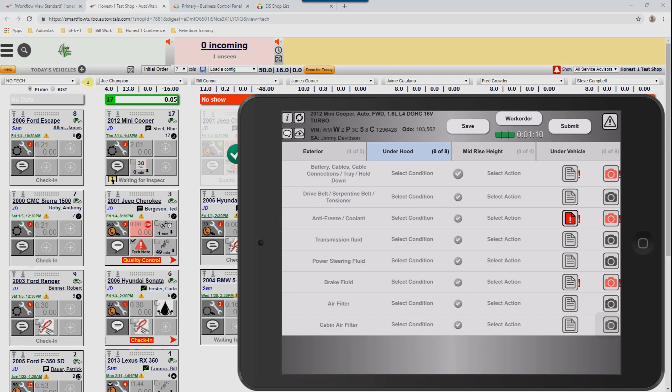In this case, I'm going to go ahead on the serpentine belt and tap on it that it's got a problem. I'll tap where it says select condition instead, and say the serpentine belt is fraying. Then I'll tap off to the side, and you'll see it's automatically marked as a fail.

Now I'm going to tap where it says select action, and say what I want to do about it. In this case, I want to replace the serpentine belt. Then I'll tap off the side.

Anything that requires any type of repair, in any way, shape, or form, we want to document it with a picture or video. So I'm going to come in here and snap a picture — taking a picture of something I've got in my office here.

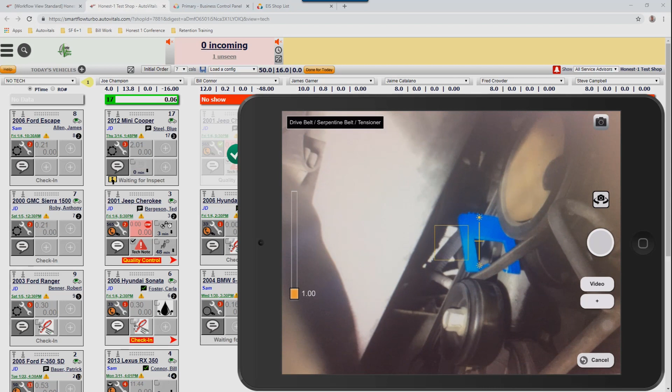I'm going to grab that, take a picture, and start using some of the tools a technician has at their disposal, the same way they'd educate a customer in the shop. So I'm going to tap on this red arrow and turn it on.

On that red arrow, you'll see it has some tools we can use. First I'll touch one end and drag it exactly where I want to point, then touch the other end to adjust the orientation.

This red arrow is the same as if a technician used their finger, a pencil, or a laser pointer at the side of the car to show the customer exactly what they're trying to draw attention to. Next, I'll tap on this little notepad at the bottom and describe what I'm trying to show — same as the technician would do in the bay if a customer was there.

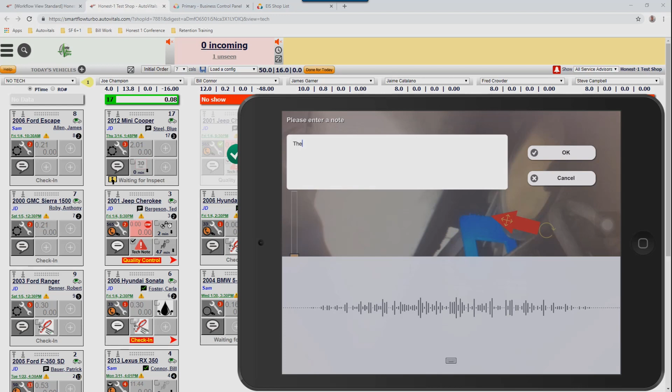I'm also going to start using the power of the tool with voice to text. I'll tap on the microphone and talk: 'The red arrow is pointing directly to the surface of the belt, where you can see the edge is frayed.' Then I'll press upload.

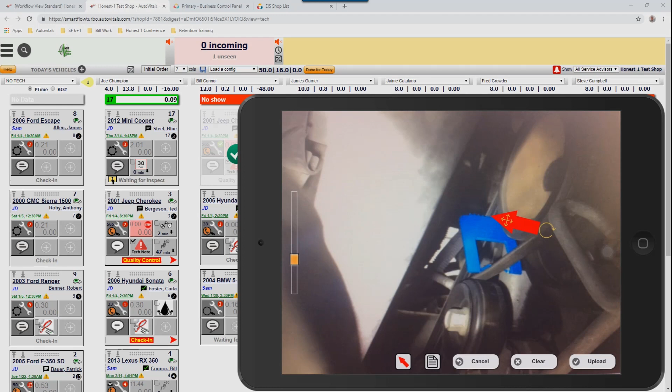So these are tools that we have to work with on the tablet. Again, what we want is the service writer and technician working together as a team, using these tools to educate the customer.

The next thing I want to do is point to this note field here and tap on it. When I tap on it, you'll see a couple things going on — there's a little camera icon with a number count. I'll press that, and it will open up and show me the pictures I've taken.

And the good thing is I can also see the topic that I've taken the picture at and the notes right there on the top of the picture. So a great way to think about this is if you've taken some freeze frame data, screenshots, LabScope waveforms, pre-alignment specs, and so on.

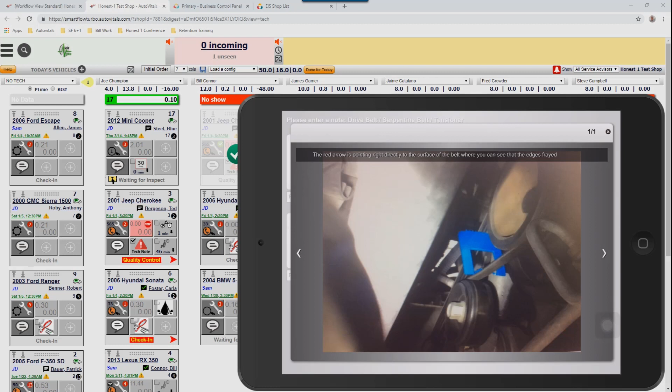This is a great place where the technician can go back and find that information. In the note area here, you can see that it's broken down into internal and external notes. So an internal note, what we want to do is supply the service writer with what they need to do their job.

So I'm going to tap in that area, and tap on the microphone again. This vehicle needs to have the serpentine belt replaced, period. It's frayed on the edges. New paragraph. Serpentine belt has a 130 amp alternator. New paragraph. Estimated labor time, 1.2 hours.

So that's really all the service writer needs to do their job, and it's all protected from the customer, and it says for shop eyes only. What the customer needs to know is, and again I'm going to tap the microphone, this belt is fraying, needs to be replaced. It will derail soon and cause you to be stranded. And I'm going to press OK.

So again, what we want to do is while we're creating our test topic here, mark some topics good, no issues, and make sure you've got pictures on a minimum of 2 topics.

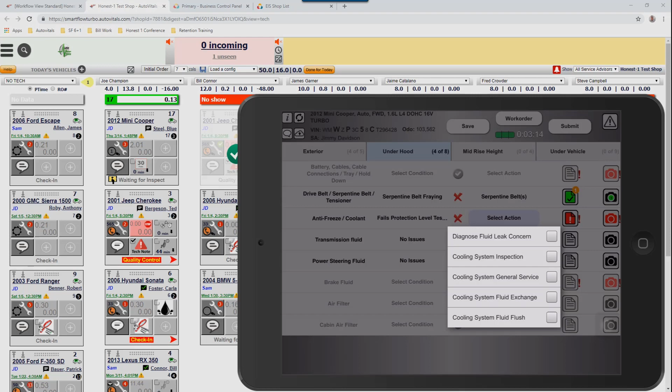So I'm going to go ahead and grab one other topic here. I'm going to say protection level fails. I'm going to tap my action, what I want to do about it. Cooling system fluid exchange. I'm going to see if I can find a picture that I can take. Maybe I've got one here. We'll just grab this one and pretend it's the cooling system.

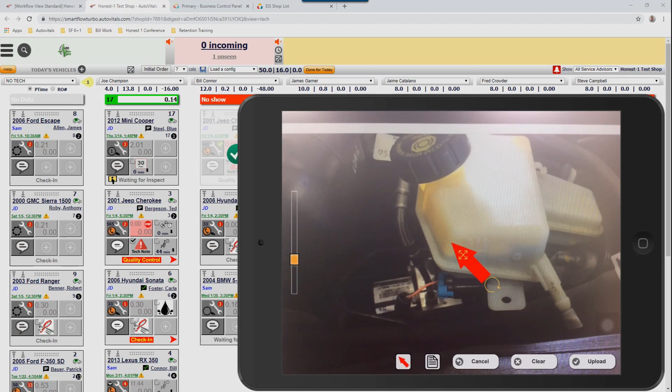Put a note here. Level is low and protection level is below the recommended freeze point. And upload. So if you would, I'm going to give you approximately 4 minutes to create an inspection topic or your mock inspection sheet, and then we'll move on.

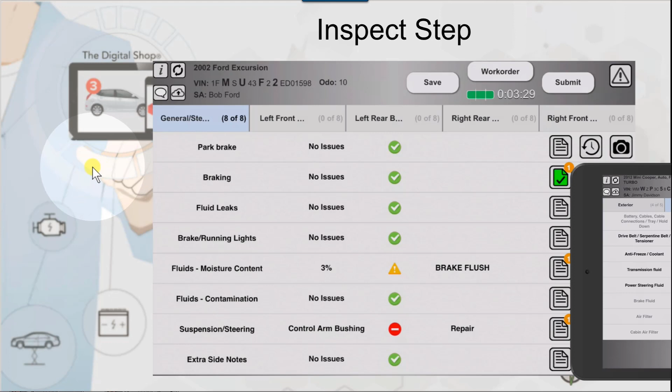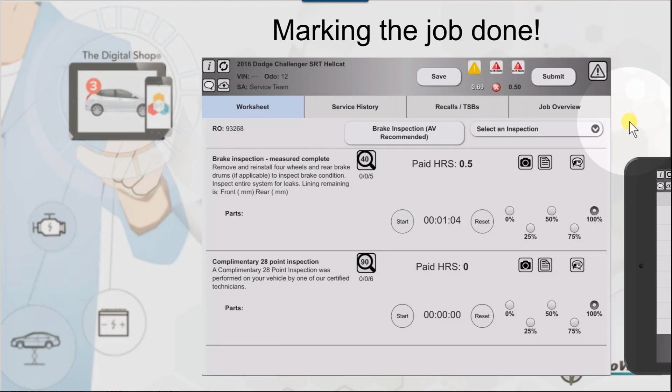What we want to do next is be able to submit the inspection results to the service advisor and let the technician continue working on the vehicle. And to do that, what we're going to do is mark the job complete, and then we're going to use the Smart Chat bubble to submit it to the service advisor. So let's switch back over to Live Shop and see how this works. And bring my tablet back up.

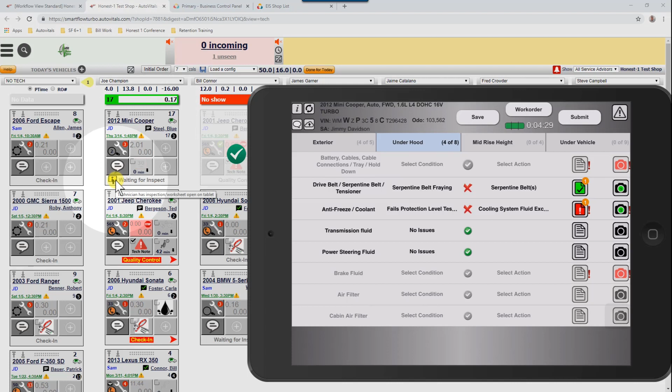And again, while the technician has been working along, you can see this timer's been incrementing, and you can see this bar coming across, and you can see the technician still working away. So we want to submit this to the service advisor. So what we want to do is tap where it says work order and change back to the worksheet.

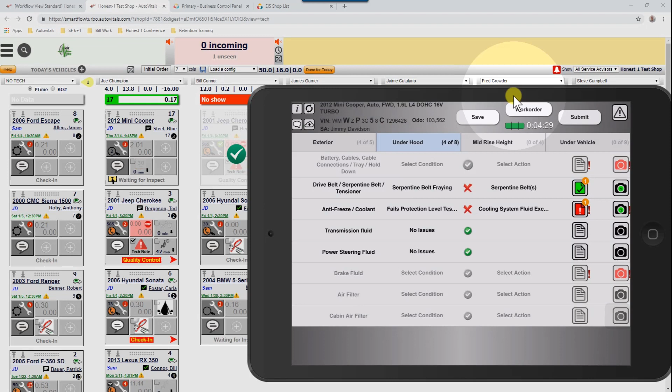We're going to pretend the inspection is completely done. So what I'm going to do is tap and mark the inspection sheet 100% complete. And then I'm going to tap the Smart Chat bubble that's right over the top of it. And before I do, I want to make sure you draw your eyes' attention to this area up on the top. And so now the technician can still go about his job working on his vehicle. He submitted this to the service advisors so they can go about and do their job.

So as soon as the technician submitted the inspection results using the Smart Chat, what's happened is the service writer gets a message at the top of today's vehicle page, and that message has a nice link that they can click on and open the repair order. So in this case, you can see that the Smart Chat bubble was used to submit from the labor line for the inspection topic.

When an inspection comes in from the technician, the first thing a service writer should do is go ahead and click on the inspection results and look it over and make sure that everything complies with the shop policy for doing inspections. So in this case, we're going to pretend that it doesn't comply, and what we're going to do is send it back to the technician. To do that, you're going to click Reassign Inspection, and you're going to click OK and put it right back on their tablet.

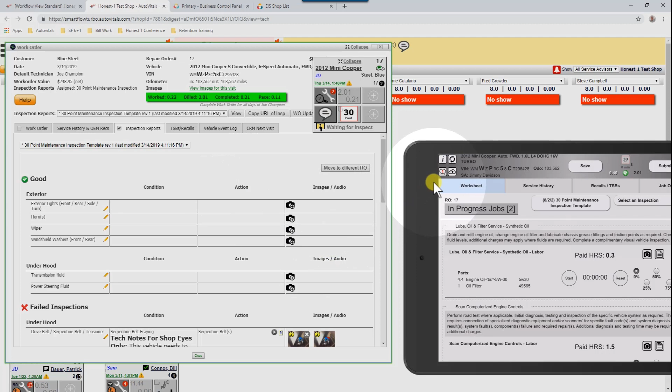I also want to highly encourage you that if you send it back to the technician, don't ever send it back without letting him know what needs to be done. To do that, click on this bar, click on the chat bubble, and send them a message letting them know what needs to be done. In this case, we'll say it needs tread images, the technician forgot, then press send. Don't send it back without giving some expectation of what needs to be done. On the technician's tablet, if they have it open, they'll see it flashing, and if they're not paying attention, they'll soon hear an audible alert. I'm just going to dismiss that audible alert.

Now we're going to look over the inspection results that were sent. In this case, everything's in good shape. What we want to do is move the repair order to the lock step, where it's creating estimates so nothing goes to the technician as it gets added to the management system. So in this case, I've locked this so nothing goes to the technician. I'd like you to respond to the poll and let me know you've locked yours also.

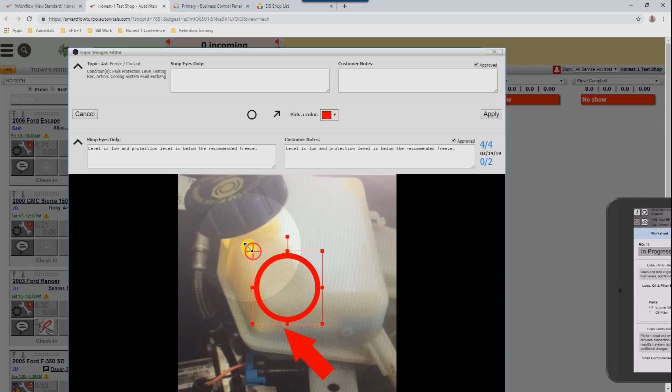I might put a little more reinforcement here. I might come in and use one of the tools, like maybe a crop, to get it dialed in a lot closer for them to work on. I might add another circle around the area to draw a bit more emphasis on it. When you're going through doing your mock inspection, come in here and just grab some of the tools and use them to see how they work.

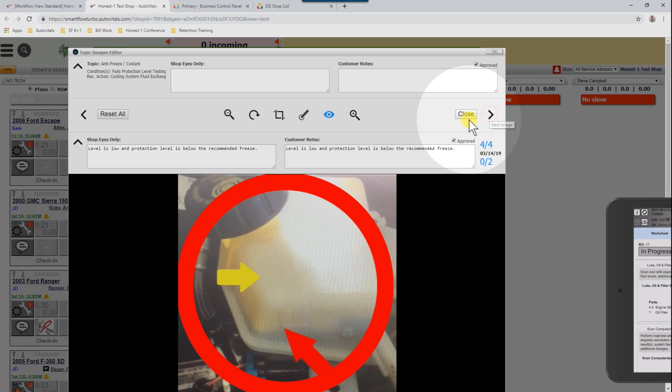I might also want to experiment with changing the colors on them and so on. In this case, I'm going to leave that red, but I'll add another arrow to it and make it a different color just because I can. Again, experiment a little as you go on. You'll see these number counts change as you go through here. I'm going to click apply, and if there's nothing else I need to do, I'll press close, and I've got all my editing done at this time.

The next thing I'm going to do, depending on what management system is on it, I might go ahead and press the work order update button and send the information, the service packages or labor codes that have been in here, the canned jobs, send it over to the management system so I can actually estimate.

So after we've done all our editing and moved it over and built a good estimate, anything that the technician recommends on the inspection should be estimated by the service writer and be ready to present to the customer. And when I say anything the technician recommends, I mean recommended and supported by proper documentation. So if that proper documentation is some text, a picture, circle, arrow, or whatever, if it's supported by proper documentation, it needs to be estimated by the service advisor.

After they estimate it, they're going to move it over to a workflow step that's waiting for approval. What's going to happen is they'll have this little icon pop up with a clock in it. And when 20 minutes goes by, they're going to see a little phone pop up on the screen. So what we're going to do next is move back over to Live Shop, and we're going to send it to the customer.

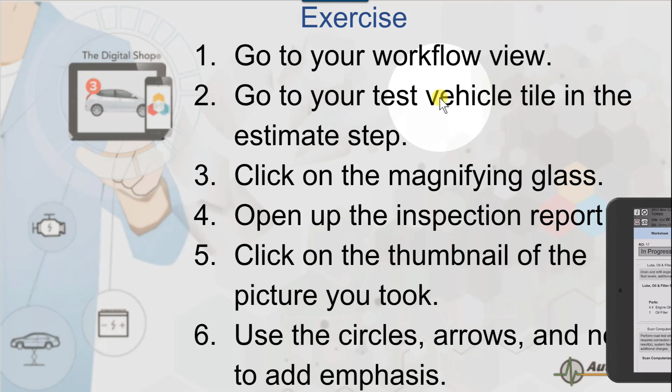Before we go that far, spend just a few minutes and edit some pictures on your own. Use some circles and arrows, get them on the screen, and let's make the inspection results impactful enough to the customer that they're ready to start talking about options and pricing. Authorization through education is the tool we want to use, and we want to put that customer in a position to buy rather than feeling like they have to defend themselves from being sold to.

The next thing we want to do is move over to Live Shop and actually send the results to the customer simply by moving it over to the approval step, and that's what we're going to do next. So let's move back to Live Shop.

Now what I'm going to do, because the estimate's already completely done, is move it over to waiting for approval. When we click OK, it's going to let us look over the inspection results and make sure they're in great shape before the customer actually sees them. Then the only thing we have to do to send it to the customer is just press OK.

So what I'd like you to do is move it over to waiting for approval and send the results to yourself. I want you to see the link here where the customer can go ahead and adjust their communication settings. They can move these sliders on and off and press submit to configure these exactly the way they want to.

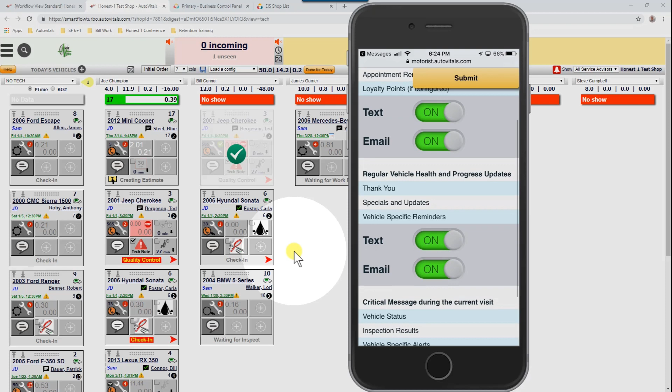The next thing I'm going to do is come down here and get the inspection results, and let's take a look and see how we did.

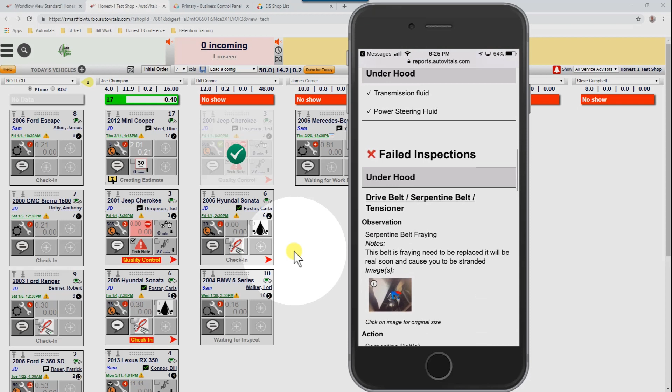In this case, we can see the inspection results, the service writer, technician, see all the things that are good. We can see things that have a picture on it. We can tap on that picture, make sure the customer understands that they can go ahead and click on it, and they'll be able to see exactly what that picture means to them along with the text and be able to zoom in on it. And if we've done our job, we'll also have some informational videos that show them exactly what's going on with their vehicle.

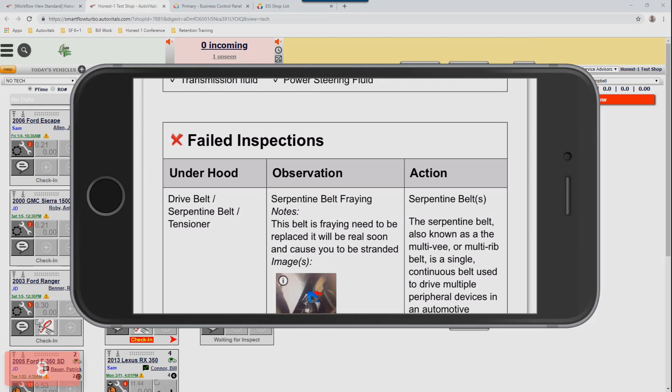So again, let me know with the poll that the inspection results came to you on your device. You can see this number right above here that's been incrementing as I've been looking over the inspection results. You can see this number counting up. We want to get to a position where the service writer lets this number count up until it doesn't count up any higher. And if 20 minutes elapses from the time you sent the results to him, that's when you'll get this nice little phone pop up.

The way I like to use this phone is if you click on it, it's going to pop up and show you the customer's number. If you call and you don't get a live human, press cancel and just leave the phone on it. If you call and you get a live human, come over here and click OK, and you'll see a nice check mark, and it's going to move back over here the way you'd expect. At this point, we should see waiting for approval.

The next thing we want to do is after work has been approved, come down here and mark it waiting for work finished. Click OK.

It's again going to verify that all these jobs added on here are what we want the technician to actually do. We're going to watch the technician mark the jobs done on his tablet. So I'm going to grab my tablet and mark a few jobs done. Let me stretch this out a little bit bigger so you can see. As I'm marking jobs done, I'd like you to watch these numbers here change.

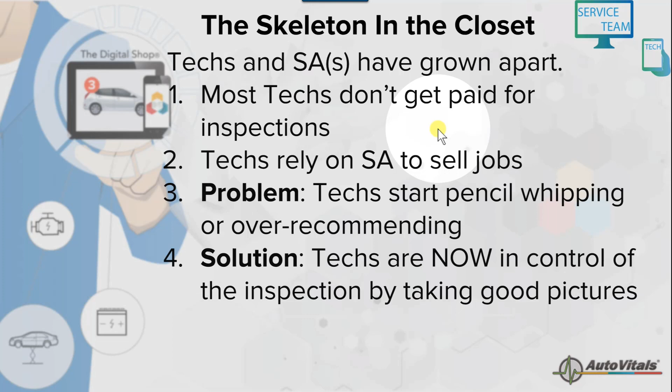If it doesn't get approved today, it's no big deal, because we're going to repurpose the inspection content on the next reminder sent to the customer. Technicians are now in control of their own destiny by working with the service advisor to put the customer in a position of authorization through education, moving them into a mood to buy rather than feeling like they have to defend themselves from high pressure sales. Anytime we can give the customer the ability to make educated buying decisions based on the content we send them, that's a great place to be.

Let the technicians witness the way you're doing this at the counter with a customer if you can. If not, maybe send these inspection results to their own device and let them take a look. Or in a shop meeting, open up some inspection results and let your team critique each other's work in a positive manner—what can we do better with these pictures, circles, and arrows to make this more educational to the customer, in terms they could understand, not technician lingo.

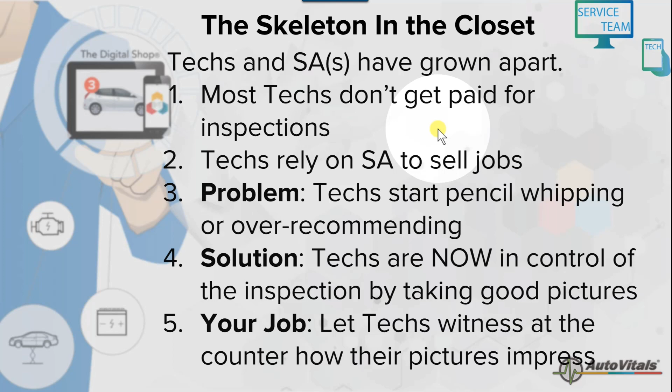So these are some exercises for you to do when you go back to your shop and start working with your staff. As the implementer, your job is to learn today and then immediately start training your staff, which will be great reinforcement for you.

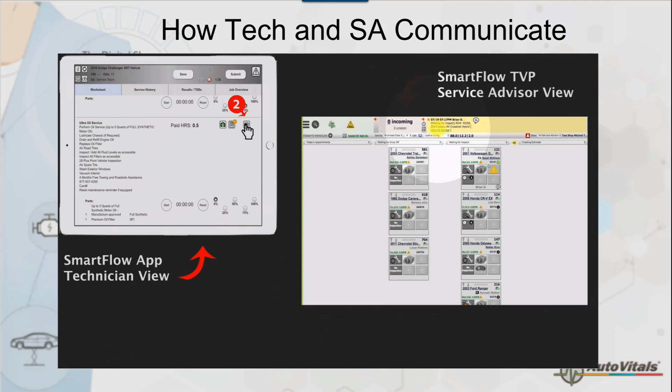We want everybody to know that using the internal chat communication is the number one way to save time, so there's no wasted time and there's great documentation. You can see that yellow arrow, or highlighted yellow area, telling the service writer exactly where the part needs to be added or the adjustment needs to be made, so they don't have to read the entire repair order. Just tapping on the smart chat icon right on the labor line where the change needs to be made highlights it in bright yellow for the service advisor.

We also want to make sure you feel empowered to go ahead and train your staff, and that you know there's a tool out there called the Business Control Panel. I'm going to give you a brief overview of it—I just want you to understand where it is and how to find it, so you can get with your product advisor and start using it.

To find it, go over to the hamburger menu and left click on it. Go down to where it says BCP, Shop Meeting, and click on it. That will open up the Business Control Panel.

The Business Control Panel is a great tool because unlike traditional dashboards where you had to first look and then do detective work to figure out what's going on, we put behaviors in a graphical format so you can understand everything that's happening. When you first start with your product advisor or digital coach, they'll help you set some thresholds you can design for your shop to make sure everybody's trending in the right direction.

Then they'll go into an area we call primary, where we know every shop has to have a decent average repair order dollar amount, new customers, retention rate, and so on. Let's go over to a live shop so we can look at how this works. Here I'm going to click on ARO, and I'll show you a graph of how it's set up.

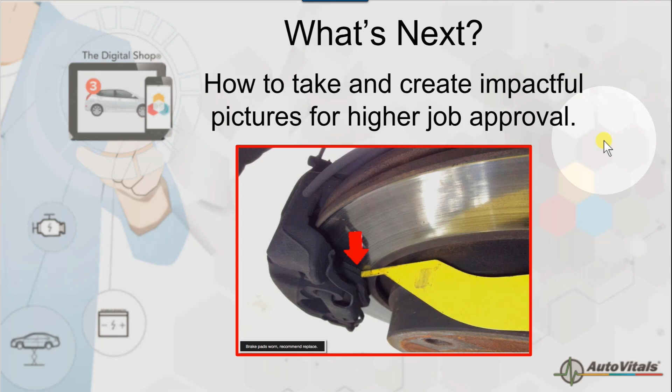I'd like to encourage you, if you don't already belong, to sign up and join the Digital Shop Talk Forum. This is a place with over 3,200 people just like you, there to help each other out, asking and answering questions.

I'd encourage you first to search. If the topic of how to do this or that isn't in there, ask the question. We don't allow topics that are perceived problems with either today's vehicle page or the tablet - for that, use the help button. There's a yellowish orange help button on today's vehicle page on a work order pop-up, a little triangle on the technician's tablet to submit a help ticket, and on the business control panel there's a blue question mark. These are all areas where you can submit questions or help requests.

The reason we don't put these type of questions on the Facebook forum is that we capture a lot of information, just like if a check engine light comes on a car - there's freeze frame data. We capture the same kind of information from today's vehicle page or the tablet, so we can get to the root cause of the problem quickly and efficiently without a lot of back and forth with the shop.

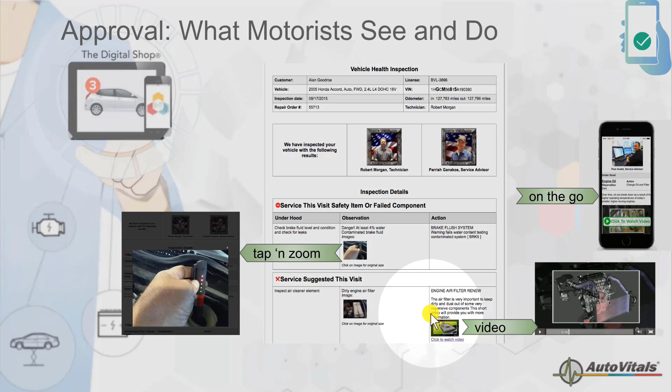We also talked about taking some pictures of things that are good. Our drop-off conversation with the customer goes along the lines of, "Ma'am, sir, this is what an inspection result looks like. You're going to see some pictures here. These are pictures of things that are good. You're going to see some pictures of things that are wearing, and some things that, in some cases, actually need some attention."

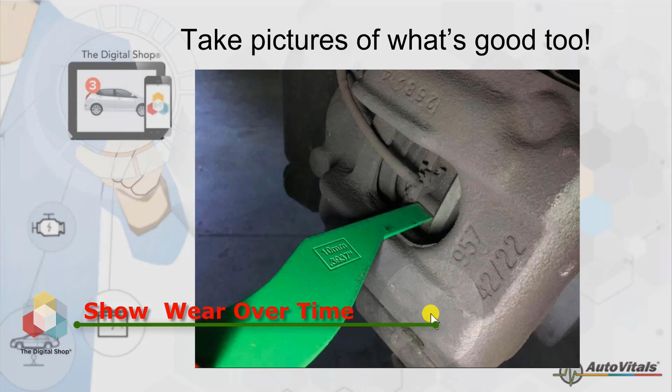The reason we take pictures of good items for future visits is because we can use that to help predict over your service visits with us the rate things are wearing at, in case you need to budget for future repairs. So that's a great thing to do.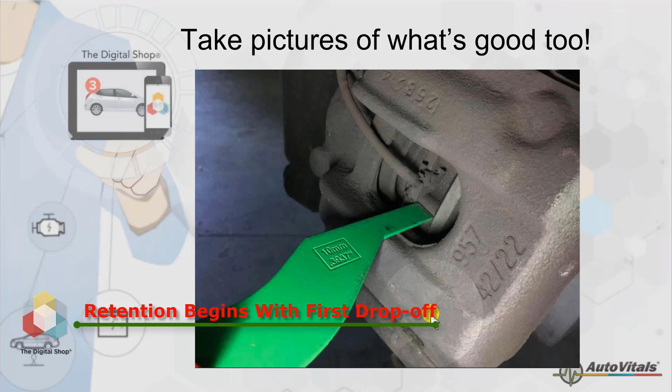What I'm going to do here in just a minute is actually start through the picture taking process and show you how to use some of the tools on your tablet.

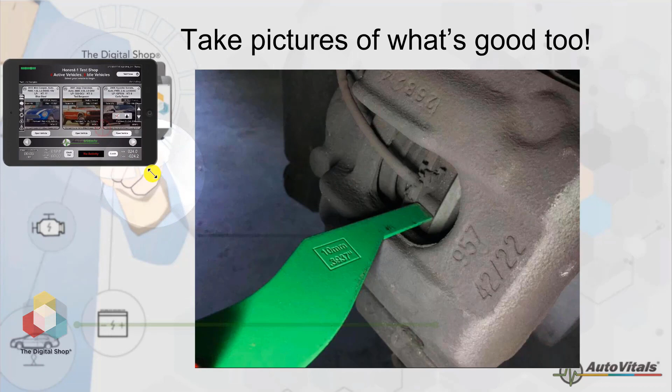So what I'd like you to do is get your tablet out and follow along with me. I'm going to put my little mini over here on the side so that you can follow along with me and still be able to take a picture of what's in the center of the screen here.

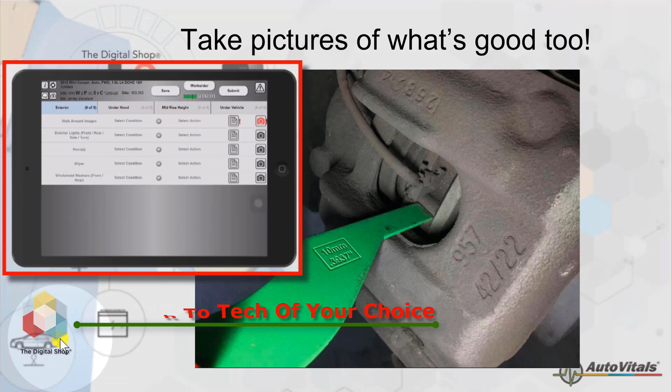So if you would, dispatch your little Mini Cooper to a technician of your choice. Press the open button. Open an inspection sheet of your choice. And what we want to do first of all is find a brake topic.

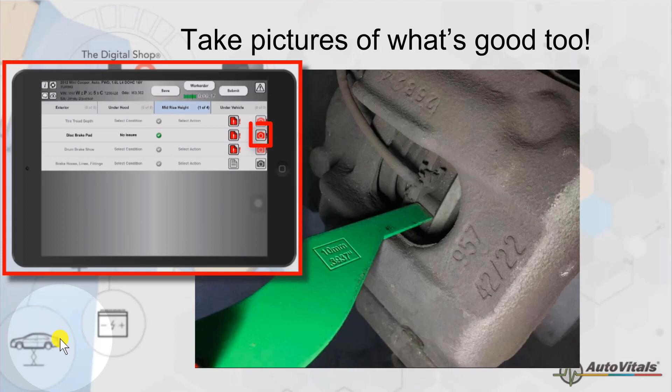In this particular instance, I'm going to tap on my brake pad as far as it having no issues. I'm going to tap on the camera icon, and I'm going to snap a picture of this. And if you would, follow along.

I wanted to add a red arrow. I want to take the red arrow and touch on the point end of it and drag it over toward where the brake gauge meets the caliper or the brake lining, and rotate it around.

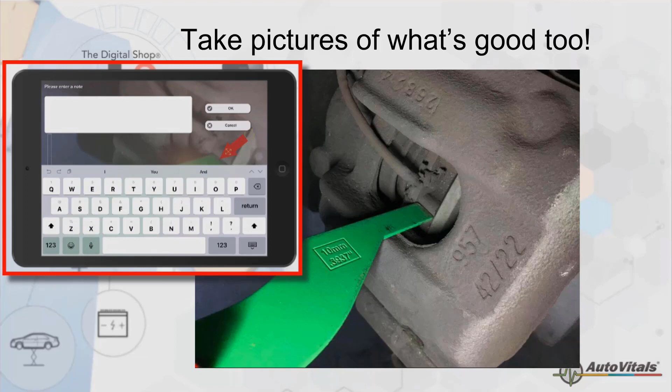I want you to tap the notepad on the bottom edge of your camera right here, and add a note. I'm going to tap on the microphone to add this note, and my note is going to say: the arrow is pointing right directly to the inner brake pad on your front caliper, and it is in great shape today.

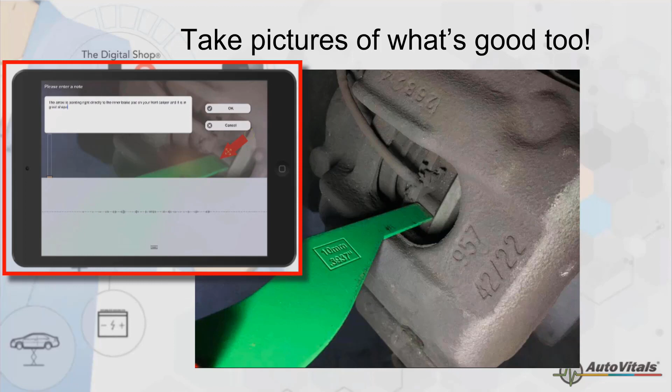10 millimeters is almost new. And then click upload, and you finish out your first picture.

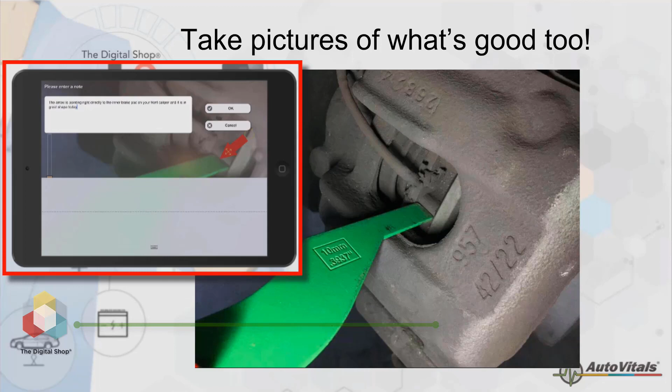The next thing I want to do is switch on to the next topic. I'm going to move over and get my other image up here. I want to add an arrow. Again, we're going to take and point it right directly to it.

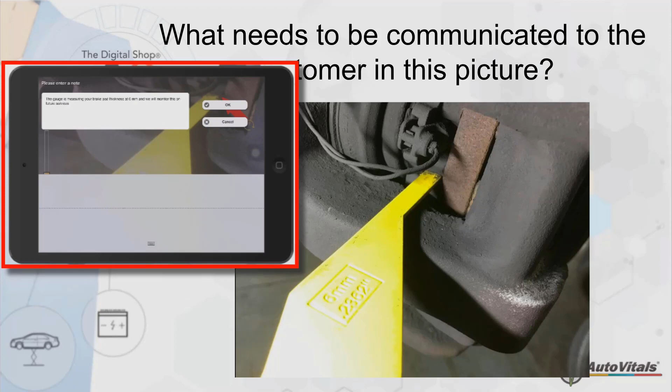The gauge is measuring your brake pad thickness at 6 millimeters, and we will monitor this on future services. And we're going to upload it also.

I just want to make sure we mark no topic on this one is needed. And on the second picture I took, I want to go ahead and make it say suggested for future service. You'll see why when we go do some editing. Again, it doesn't matter that we're putting these in the exact place they go, because we're talking today about editing pictures.

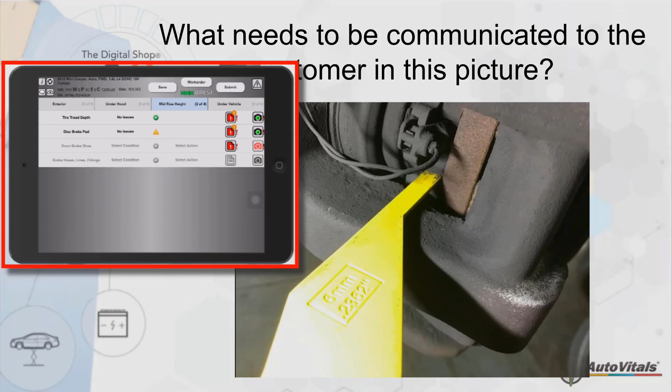So when you think about it, a battery status tester with the terminals, taking a picture of that can be a quick win. And if it's not, we're still showing the customer the condition of their battery changing over time as it comes in on subsequent visits.

Cracking belts is another one. Brake pad thickness, so we've already taken a few pictures. Fluid leaks and anything in the suspension that has any kind of movement, rattle, or noise. Even pulleys, grinding noises and things like that, because when we take video, the audio is still going to be captured with it. You can see here a couple instances where we've actually done a pretty good job of that. But we're going to move forward a little bit more.

I want to challenge you to understand that a picture alone does not get you a job authorization. When you look at this picture, whether you're a service advisor or technician, look at it through the eyes of the consumer. Does this picture really tell you anything? Would it stop your thumb on the phone, or could you even tell what's going on in the picture? A picture alone doesn't really do justice.

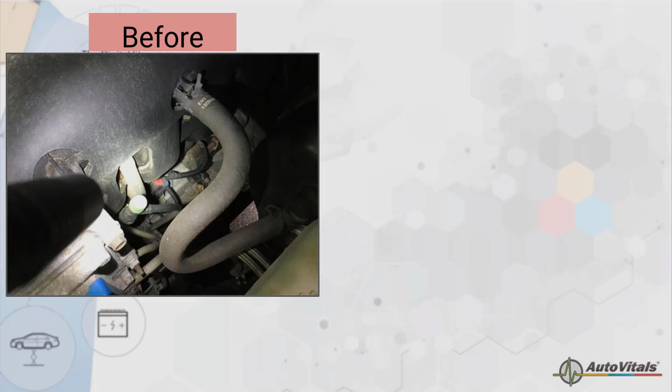But if we take it one step further and put some emphasis on the picture by pointing an arrow to it, drawing a circle around it, and adding some text, it makes it very apparent that the tab on the connector was damaged and the sensor was not plugged in all the way. Can you see the difference between an edited and a non-edited picture?

Think about the customer. Think about what they would see in the shop if a technician had the service writer walk the customer out to the vehicle and show them what's going on. I promise you the technician is going to take their finger, a laser pointer, or a long narrow screwdriver and point right to that connector, and say a few words to the customer: the tab is damaged, the sensor was not plugged in all the way, and this is what was causing your problem.

Again, we don't really want the customer hanging around the shop, but we still want to use the number one tool we've had for as long as I can remember, and that's show and tell at the side of the vehicle with the service advisor and the customer.

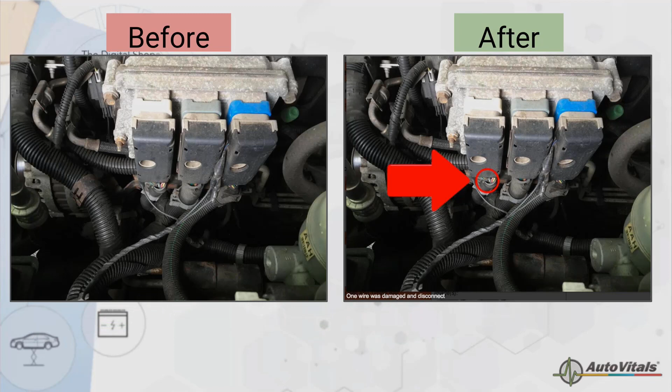Here's another before picture. I challenge you to find and tell me what was wrong with this, again looking at it through the eyes of the customer. Now we've got a service writer and a technician teamed up. The technician is taking his finger and drawing the red arrow, the service writer adds a circle right around it, and the technician supplied some text that the service writer enabled. So here it's very clear to the customer that the wire was damaged and it was disconnected.

Again, this is how we put the customer in the position of authorization through self-education, where they call the shop ready to talk about options and pricing.

We're going to take some more pictures here in just a minute, but before we do that, I want to open up a live shop and make sure your settings are configured properly for the default colors of the arrows for the service advisor.

To verify this, we're going to go to the top left where the three bars are, called the hamburger menu. Left click, and go down to where it says Inspections, then go to Inspection Sheets.

We want to make sure the color for each of these statuses actually draws the customer's attention to it. To change the color, click on the pencil, then use the color picker to choose the color of your choice. Good is normally green, future or suggested service would be yellow, and fail would be red, just like a traffic signal. But you could have more statuses enabled for your shop, and you'd want to choose the appropriate color, which becomes the default color for your circles and arrows.

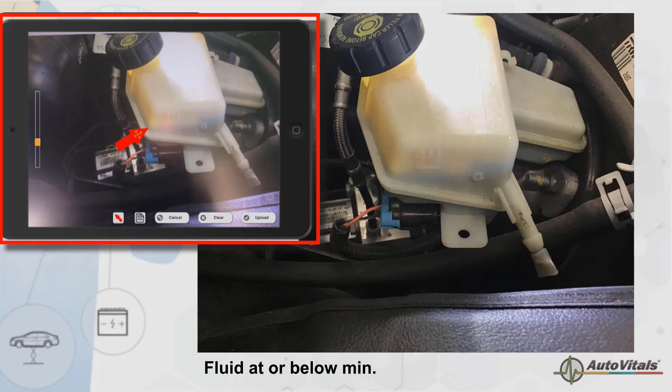I'm going to tap on the microphone and describe what I see in customer-friendly terms. The brake fluid is low. When it's low, that's normally a sign that the linings are wearing thin.

And then OK, and then upload. Easy as pie, that's our first picture.

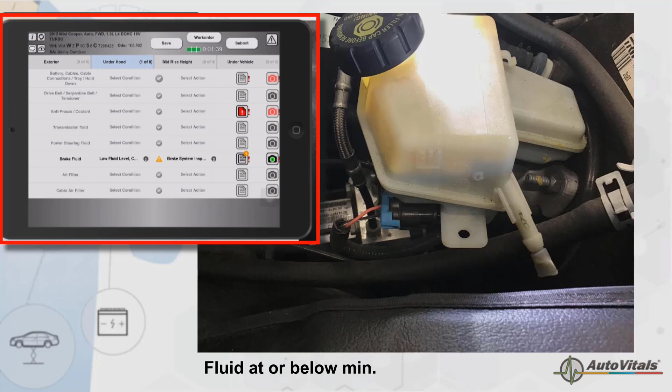I'm going to move over and take the second picture, which is going to be on the same topic. So I'm going to tap the camera again, get in close, and yes, I'm going to add an arrow. That arrow is going to point right to the colored strip, and then I'm going to add some words here to describe this to the customer.

The red arrow is pointing right directly to this test strip, and you can see that it matches the test strip tube, where it says replace brake fluid due to contamination.

I'm going to press the upload button. And now what I'm going to do is tap on this camera button here.

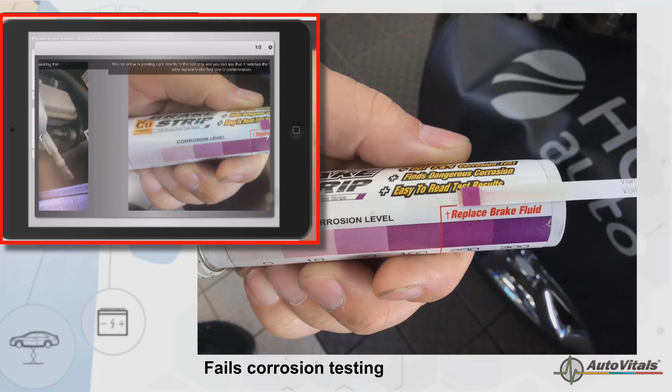What I want you to understand, as a technician, is that by tapping on the camera in this area, you can go back and see your note, and you can also scroll through and see the pictures you've taken. That can be very handy for freeze frame data and other reasons.

I'm going to tap into the Technician Internal Note area for shop eyes only. The brake fluid is dark brown, it's low, and it also fails the test. I recommend a complete wheels-off brake inspection, and regardless of the pad thickness, a fluid exchange.

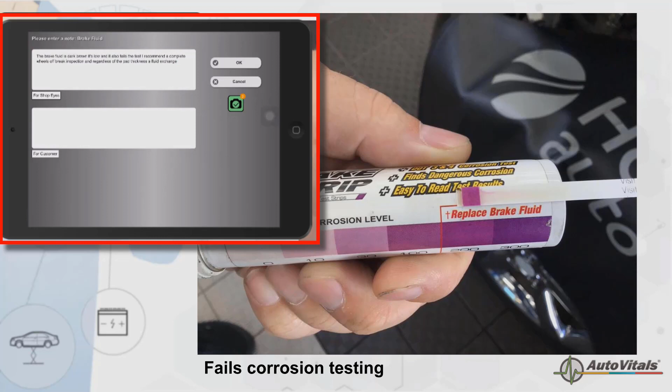I'm going to go down into the customer note area. Due to the brake pads possibly being thin due to low fluid level, I recommend a wheels-off brake inspection, and in either case, I recommend a fluid exchange due to the contamination. So, 2 different types of notes.

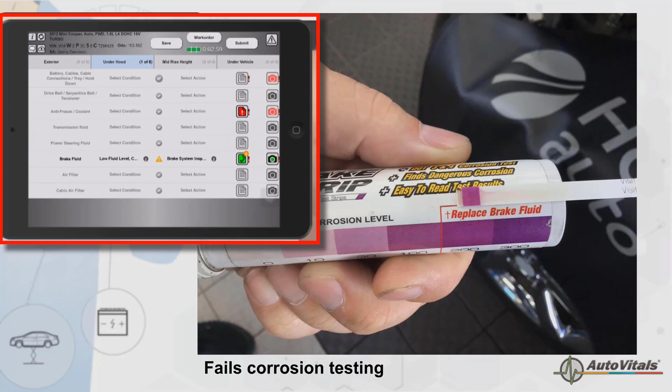I'm going to move on to the next picture we want to take. Under hood, I want to look for the belt topic, which in my case is the second one down. I'm going to tap that the serpentine belt is worn out, then tap off to the side. You can see it's automatically marked as a fail. I'm going to say what I want to do about it, which is replace the serpentine belt.

I'm going to tap the camera button again and let it focus on my belt and tool. As a good technician, I'm going to take an arrow and point right directly to it, rotate it around, and let the customer know what I see.

Tap the microphone. This is a tool that we use to check the belt for wear. Sometimes they look good, but they are worn, and the tool is used as a gauge.

And upload. In this case, I'm going to do something a little bit different. I'm going to go to the tablet icon on the inspection line itself, where you've got the number 1 count now, and I'm going to tap on it.

On the internal notes area: serpentine belt is worn on the face, slight cracking. New paragraph: 1 serpentine belt, 135 amp alternator. New paragraph: estimate 1.1 hours to replace.

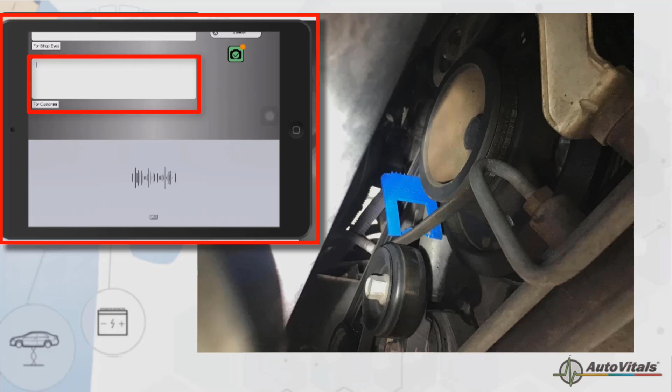And then I'm going to go down to the customer area and put a note here. The belt face is worn and it should be replaced to prevent being stranded on the road. And I'm going to press OK.

So now we've taken a picture and we've also taken some notes for the service writers. In this case, we've got another brake pad, so I'm going to come in here and take our 3rd picture on the brake linings. I want to go to brake pad, and in this case, I'm going to say it's close to the end of its life. You're going to see it's automatically marked with the yellow triangle. We don't want to do anything at this time, but we do want to take a picture of it.

Want to add a red arrow.

The arrow is pointing right directly to the brake linings that are between the caliper and the brake rotor. Again, we're only putting things here that are customer friendly.

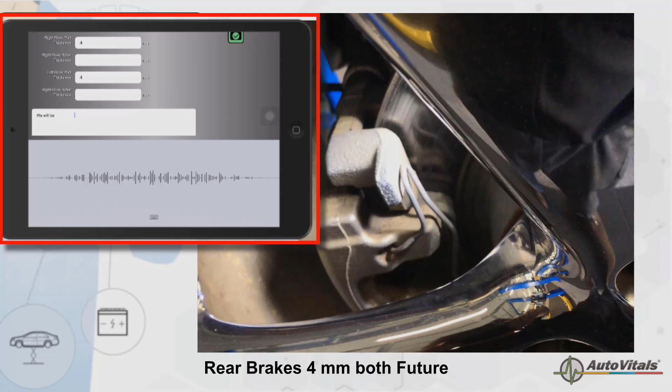And I'm going to press upload. In this case, we're going to tap on the icon and record what the brake pad thickness is, and also what the brake pad thickness was on the rear. We're going to come down here and add a note: we will be monitoring your brake pad thickness on future visits, as they are starting to get thin. And press OK.

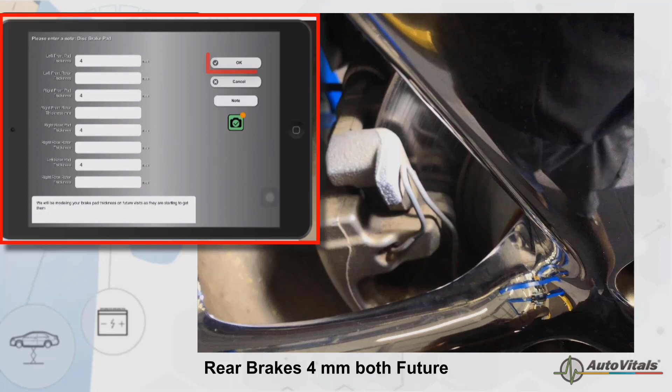Cool, we got an upside down battery, so we're going to go under hood. We're going to find the battery. We're going to select the condition, and nothing matches there, so we're just going to tap that it's okay because it hasn't failed a test.

And we're going to take a picture anyways because we can use this when a customer calls us next week and says they wanted to buy a new battery. We can look up the history report and find out what group size it is without having to have them bring the car back in. So it's very helpful in cases where we want that customer to give us a call and let us know they're coming. And in this case, I'm going to tap on the icon.

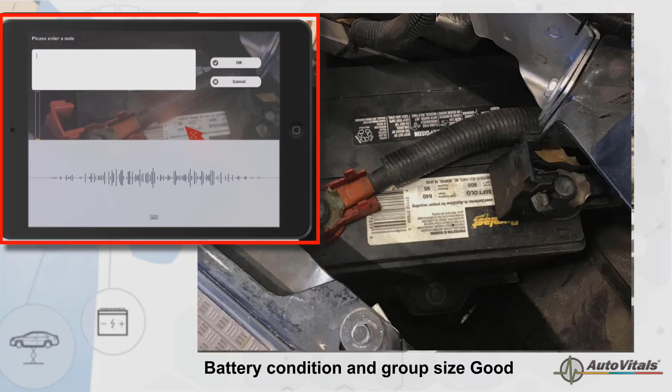The battery group size is 95. And upload. Let's go on to the next picture.

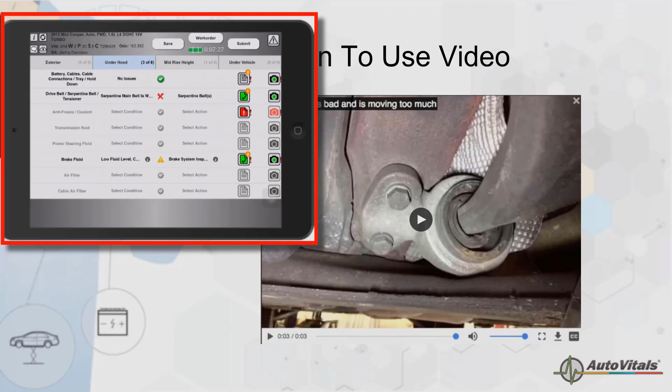And now we're getting to where we actually want to bring up a video. So I'm going to bring a video over here that you can take a video of the video. And I've got the audio turned off so you can add your own. I want to go under suspension here, so I'm going to go under mid-rise height. And let's go to under vehicle. Let's see if we can find the suspension topic. And I'm going to go to other suggested items or notes, suggested service.

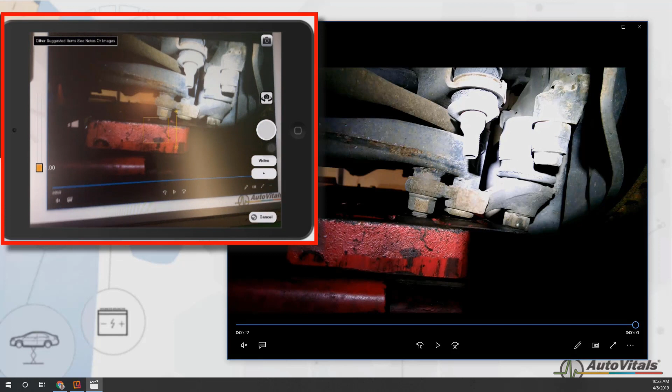In this case, I'm going to override it because it's definitely a fail. I'm going to come over to my camera and tap on it. Then, when you're ready, I'm going to give you a few seconds to get ready, and I'm going to go ahead and actually play the video so you can play and record the video also. To do that, I'm going to tap the video button that's right underneath the camera button. Now it's enabled for a video. And I'm going to press the record button and let you take a video of the video.

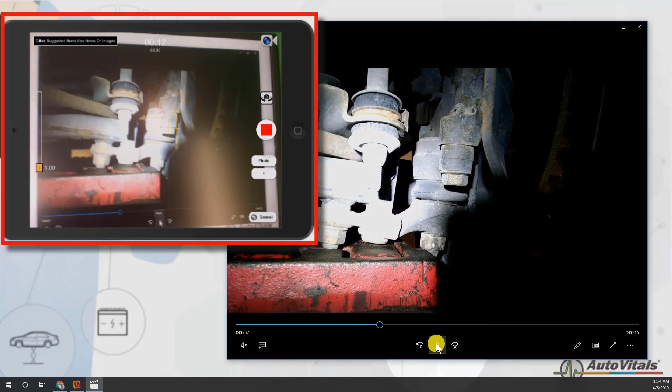So in this case, what we're seeing is the ball joint popping in and out of the socket. It really needs to be replaced because it's getting to be where it is going to be a safety issue shortly. Regardless, it's still changing your wheel alignment.

So you can see it's captured a full 20 seconds of video along with the audio. Now we've got these nice markers at the end of them on both sides, and what that's for is to take and adjust the in and out point in the video. In my case, I always prefer to let the service writer have all the information they need to work with, unless I've captured something that I don't want them to be able to hear or see.

Now I'm going to tap the notepad that's now down in the bottom left-hand corner, and I'm going to add some notes to the video: you can clearly see the left lower ball joint has extreme wear, is affecting the alignment, and more importantly, is at the point of being a safety concern.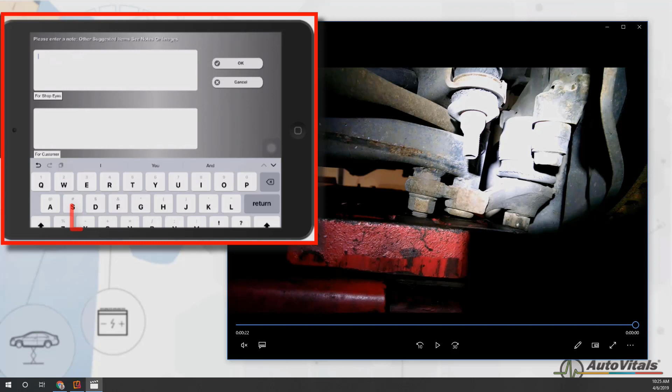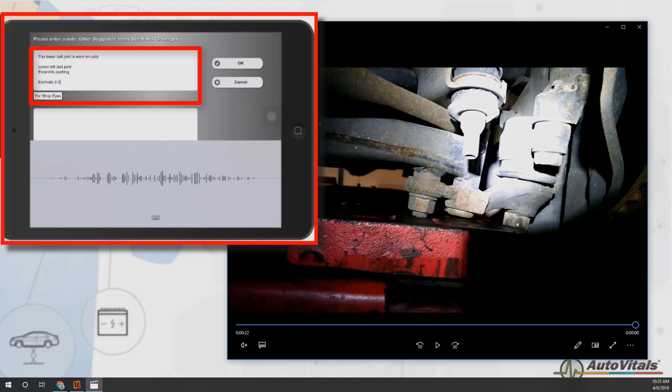And then upload. In this case, I'm going to tap the notepad for the service advisor and give them some information: the lower ball joint is worn, unsafe. New paragraph. Lower left ball joint, new line. Eccentric bushing, new paragraph. Estimate 2.3 hours to replace, and don't forget to add a wheel alignment to the repair order.

The lower ball joint is worn, it's affecting your alignment, and more importantly, this is a safety concern that needs to be corrected immediately.

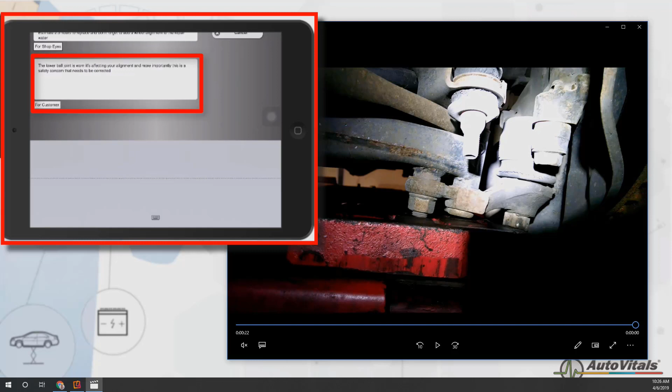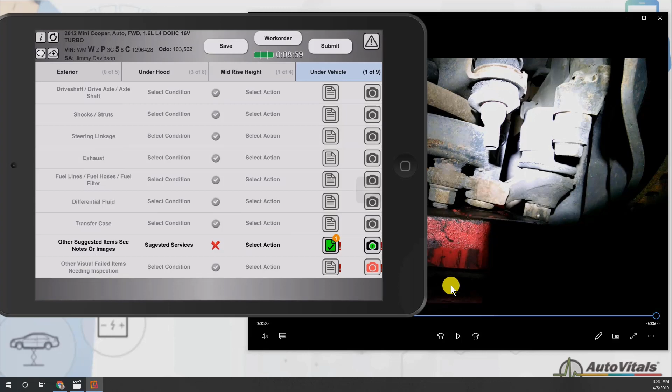And again, I've given the service advisor everything they need to do their job. Now that we've given the service advisor everything they need to work with, let's tap on the work order button, move back to the work order, find the inspection that we're working on, tap on the Smart Chat bubble to submit this to the service advisor, and then being we're completely done with the inspection, I'm going to tap 100% complete, and I'm going to continue as a technician working on other items that I have to work on.

Let's go through and do some editing on our repair order. I'm going to come up here and left click on the link. Move up on the screen a little bit more. I can see the technician submitted the inspection results. I'm going to left click on the inspection report.

I'm going to come down and look at the different pictures that are here. I'm going to left click. And in this case, I can see that this is information about it. The technician has actually not marked it failed. So what I'm going to do is decide based on this picture and the next one, which one I'm going to use.

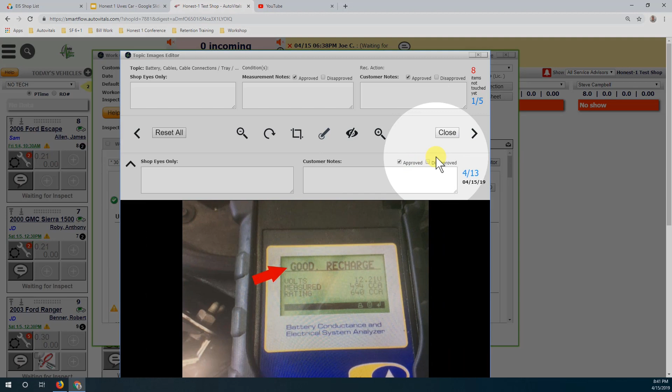Going to move to the next picture. I don't need to show this one anymore. I'm going to look at the next picture and see what the technician's done. Actually, he's got an arrow in the appropriate spot. That's really good, he's got a lot of good notes up there. I'm going to read through the notes. That looks like he's done a really good job. A good job here also.

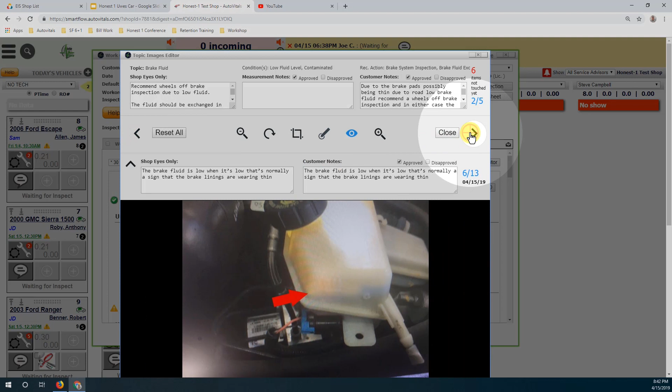And again, as I've gone through here, I've made sure that one's turned off. I don't want to show the customer anything that doesn't make sense. I'm going to move on to the next one. I can see this is already turned on and the tech's got a lot of good notes there, and this tech is always good about putting arrows there, so I'm going to go ahead and read through his information here.

I'm going to mark this one approved. I'm going to read down through the notes here. He's done a great job here also. I'm going to move on to the next one.

Now here we've got some information up on the top where the technician has actually marked some measurements. And I'm going to look over here, and you know what, he's got an arrow pointing right directly to it, but I can't show that because this topic is marked future. So what I'm going to do is come in here. See, it's marked that it's close to the end of its life. I'm going to actually show the dimensions.

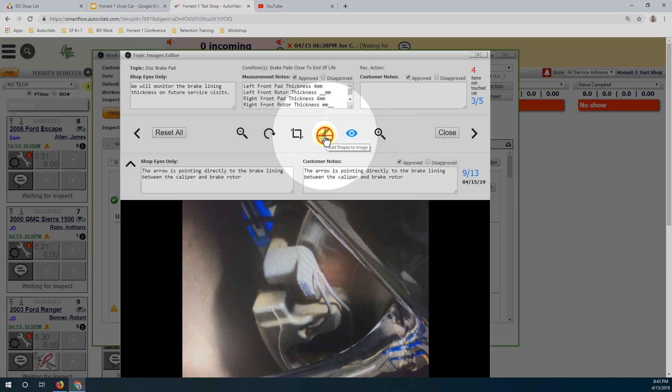And I'm going to come down here and turn it on so it can be seen. I'm going to approve these notes because he did a good job on it. I'm going to come over here and click here to add an arrow. And now, because this is marked for a future service, I'm going to rotate this arrow around, and I'm going to add a second arrow so the customer can see I'm pointing to the brake pad thickness between the two arrows. Again, I want to be fully informational for the customer.

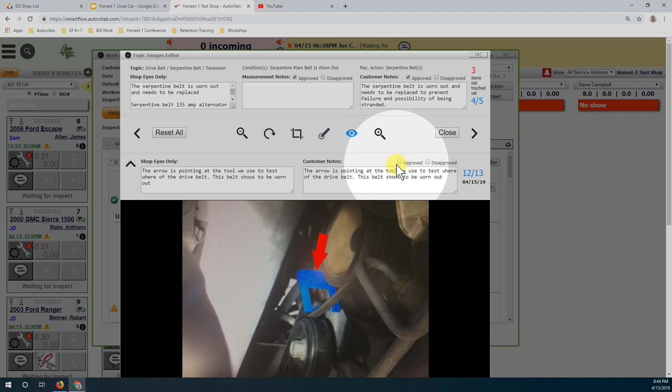I'm going to press the right arrow and go on to the next picture. Again, I don't need to see that any longer. I'm going to move on to this picture here. Looks like the technician did a pretty good job on that, but let's see what he did with the arrow. He's got a nice arrow pointing right directly to it, so I'm going to mark this approved. These are customer-facing notes on the inspection topic line. And I'm going to mark these approved because he's done a good job here also.

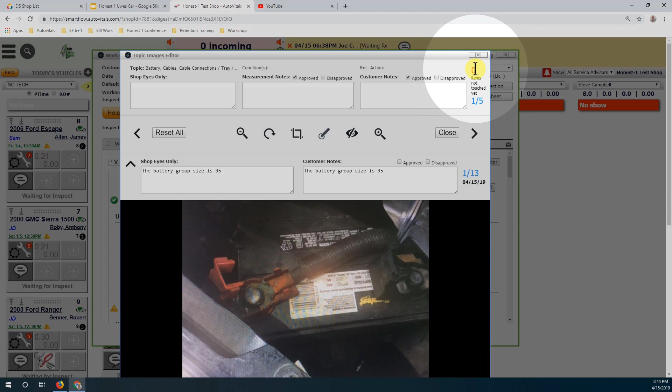As I go down through the inspection sheet, I'm going to look through here, and if I had any notes that weren't approved, they'd be grayed out. And I'm going to keep scrolling down through here, and I'm going to look at my video, and I want to take you through a little bit of video editing.

So I'm going to left click on the video to open it up. I'm going to look at the video and just give you a quick way to edit. So here what I'm going to do is I'm going to set the start point on the video. I don't want it to start playing until it gets there, so I'm trimming some off of the beginning. I'm going to come over here and trim a little bit off the end.

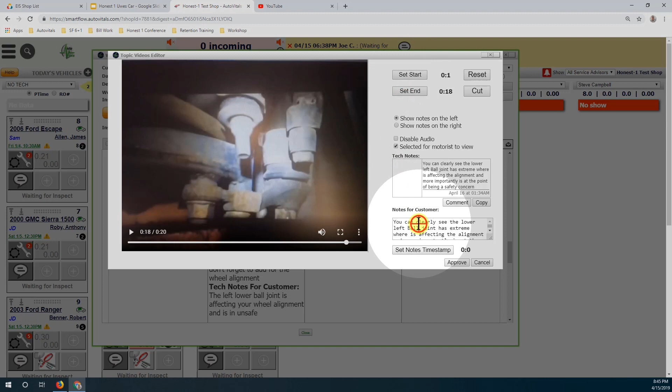And I'm going to come in here about the middle and say, I want my notes to be coming on at this particular time. I'm going to go ahead and mark cut. So it's going to cut it to that length. And then I'm going to mark approve. And now I should be ready to go.

So if you've been following along, I'm going to press the view button and let's take a look at it. So in this case, what I'm going to do is come down here and do a little quality control check. Here's our information we had on there. Here's our battery that's turned right side up, and we have our group size on it now.

We come down in here into suggested for service. You can see the arrow pointing to the low fluid. And again, this is just as suggested at this time because it's not in the danger zone, but we do require or suggest that they do a brake inspection and so on.

I'm going to come down here also to the brake pads. You can see that this is showing them where the arrows are pointing, very descriptive. Come down a little bit further. I'm going to click on and read our notes on the belt, again highly educational to the customer. And we're going to come down and make sure our video is ready to play and it's trimmed.